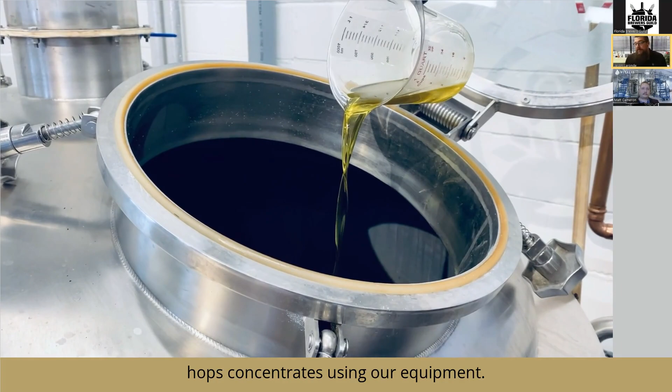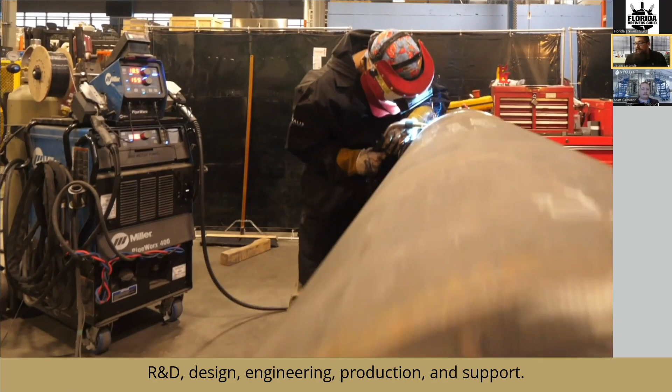So at Vitalis, we provide clean tech solutions for some really cool markets. Our experience with the beer industry actually goes back several years. It started with helping one of the world's largest hops extractors create specialty CO2 hops concentrates using our equipment. We are a vertically integrated original equipment manufacturer of CO2-based technologies with in-house R&D, design, engineering, production, and support. Our mission is to help producers thrive while becoming more resilient and future-proof.

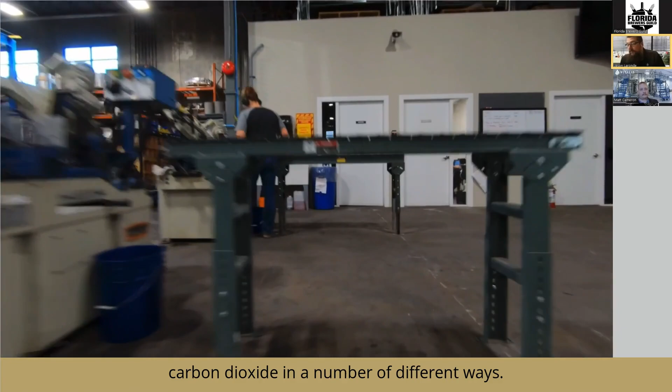We do that by utilizing the unique properties of carbon dioxide in a number of different ways, like extracting or refining natural ingredients from biomass, or employing CO2 as a heat transfer fluid and a natural refrigerant, or recovering and distilling CO2 for repeated use, which is what we're going to talk to you all about today. We have over 150 installations on 5 continents, and our CO2 expertise is recognized worldwide.

As Sean mentioned, CO2 is a big part of our day-to-day in the brewery, and it's a key part of the operation, probably something we all just couldn't live without. So when we're looking at usage in craft breweries, whether you're packaging, blanketing, or purging, we all need CO2 in some shape or form. But we also know that unfortunately CO2 is not free these days.

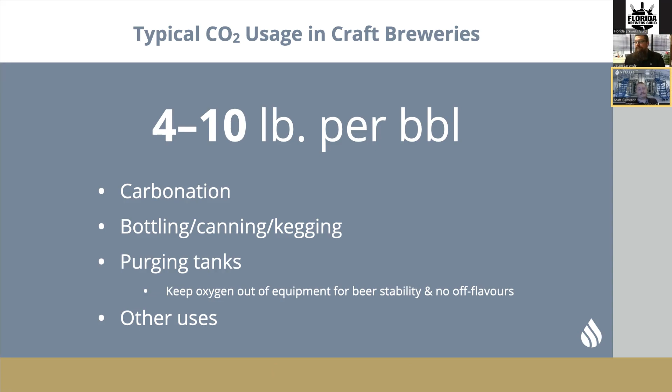CO2 prices can vary dramatically from region to region, fluctuating with factors such as shipping distances, fuel prices, transportation shortages, and supply disruptions. And sometimes CO2 just isn't available at any price. CO2 prices have actually increased by 58.2% over the last 10 years, outstripping inflation by more than 2.5 times. So these are costs that you can't entirely pass on to your customer, and you need to absorb them as an increasing cost of doing business.

We're curious if you want to drop into the chat and tell us what your current rate is for buying CO2 by the pound.

On top of the cost of CO2, supply origin is something that's nice to know in any food and beverage application where the product you're making is ultimately being ingested by your customer. It's always nice to know where that's coming from and how it's being produced, so your customers can have peace of mind as to what they're putting in their bodies.

Typically, the CO2 you purchase in bulk from your supplier will be derived from things like oil and gas wells, possibly ammonia production for fertilizer, or ethanol production. So ethanol production, okay. Oil and gas wells, maybe not so much.

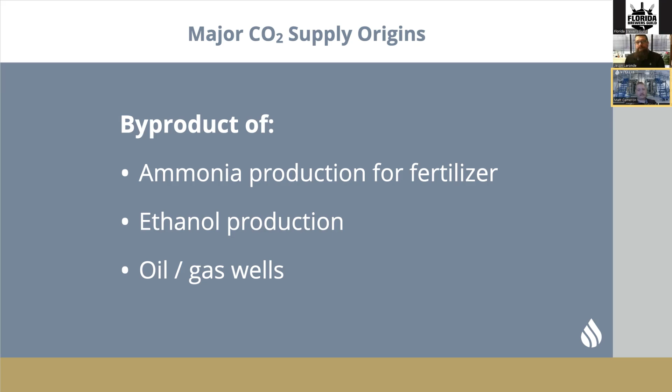As we've all seen, and we're probably all very familiar with, the production of CO2 from the various sources we just discussed can have some real world negative impacts. Whether it's plant maintenance or plants shutting down entirely, as we've seen in New Zealand, these can all result in supply chain disruptions, higher prices, or possibly even a nice little force majeure letter from your supplier, which is not what we really like to see.

One other interesting looming implication is this 45Q tax credit. I'm curious how many of you are familiar with this, but it has the potential to possibly change the landscape quite significantly, with CO2 suppliers basically being incentivized to sequester their carbon as opposed to their normal channels of selling it to their customers.

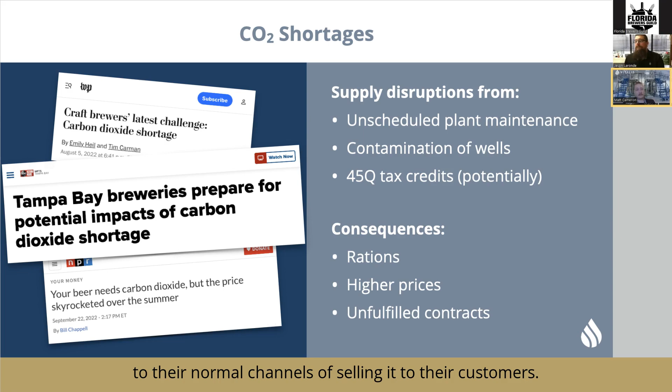So for all these reasons, we've all been frantically looking at ways we can reduce or optimize our consumption in the brewery day to day, right? Spunding, maybe chaining your tank blowdowns together, scouring the brewery for potential leaks, just to make sure you're capitalizing on every kilo or pound of CO2 you're using.

Then there's also nitrogen for purging. I know this is a pretty familiar process for a lot of breweries that are looking to knock down their CO2 usage.

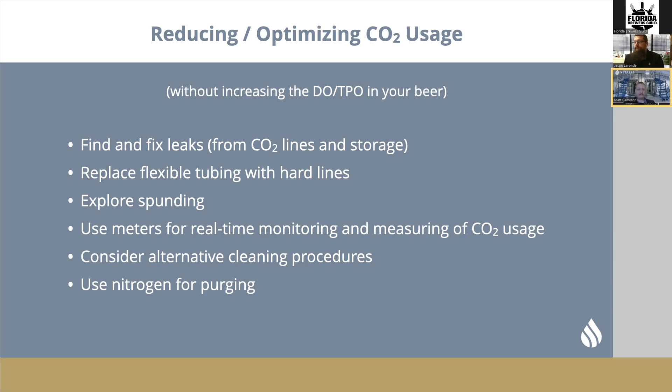So regarding nitrogen, why don't we capture CO2 from the air like we do with nitrogen? Well, this is the makeup of the atmosphere, and the majority of this air is nitrogen, which makes it much easier and more economical to capture, clean, condense, and store for use in your facility. Nitrogen generators aren't new - it's what we use in nitro brews. It is a piece of equipment you can buy. But because the vast majority of the atmosphere is nitrogen, there's a lot to get.

There's, of course, the oxygen component of the atmosphere, which is what we need to live. Then there's argon, and then there's CO2. And CO2 makes up just 0.04% of the atmosphere, so it just makes economical capture impractical.

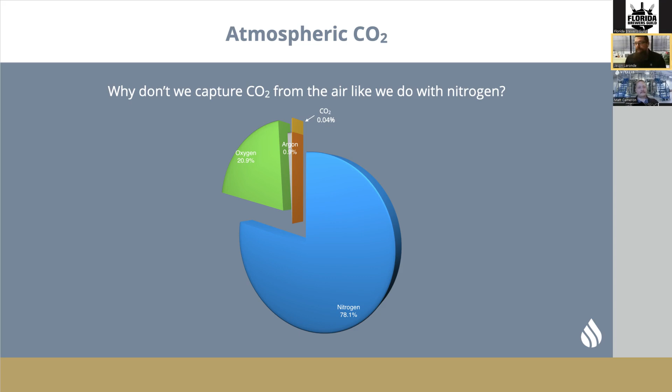Yeah, as Jason mentioned, there's not a lot to go around in the air. So when we look at CO2 produced from fermentation, the numbers are much more favorable. As we all know, there's variables that affect overall production - higher alcohol content, how much you can capture on the front and back end, depending on what system you might be looking at. But either way, it has the potential to really be the great equalizer. The ratio of produced CO2 to consumed CO2 can be as high as 3-to-1 in any given brewery.

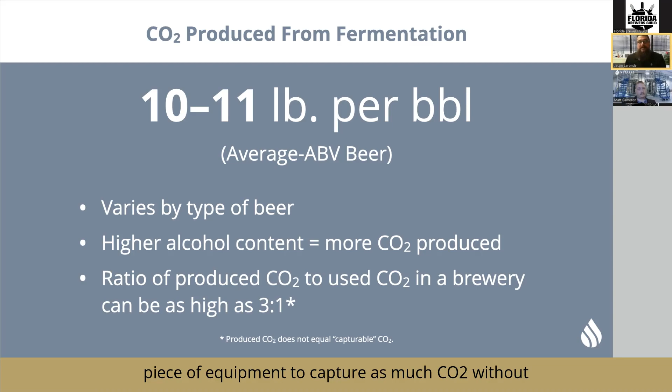So I'll let Jason maybe dive into some of the math on this. Yeah, so CO2 capture is not a new technology, but often equipment is marketed as to how many barrels a piece of equipment might be appropriate for - that's how you size equipment. But in actuality, it's more important for you to understand how much CO2 your brewery is actually producing, so that you can select the most appropriate piece of equipment to capture as much CO2 without overbuying or underbuying the capture equipment.

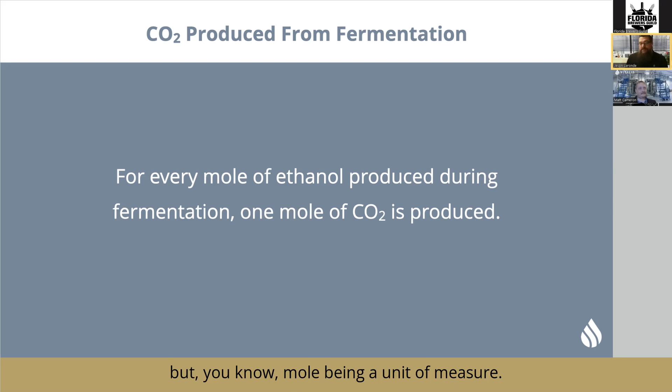For every mole of ethanol - and this is going to get really nerdy into the science, but mole being a unit of measure - for every mole of ethanol produced during fermentation, 1 mole of CO2 is produced. So we can use this formula, which allows us to calculate how much CO2 is actually being produced by each individual brewery. We look at the volume of beer that a brewery is producing per year, we look at an overall ABV of the beer or beers that brewery is producing, multiply that by the density of ethanol, then multiply that by the molar mass of CO2, and divide all of that by the molar mass of ethanol.

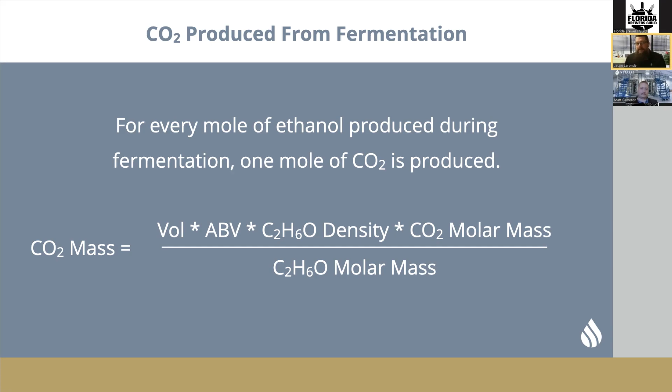We can actually figure out how many pounds of CO2 a brewery will produce every single year. And if we plug that into a couple of case study models, we're able to show very definitively on or about how much CO2 you realistically could generate. Then when we compare that against what you pay for CO2, and how much CO2 your brewery uses every year, we're able to figure out what an ROI model might look like when deploying CO2 capture equipment into your particular brewery.

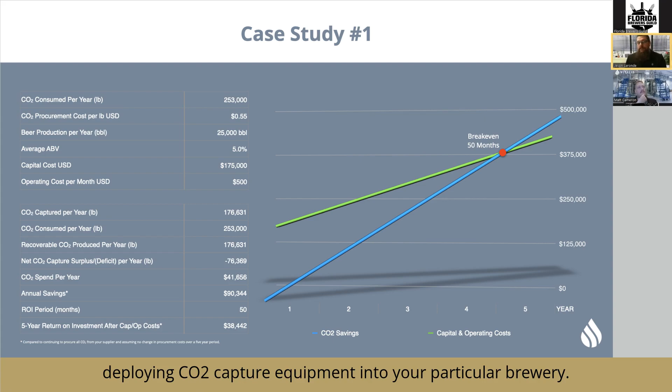In this particular case study, we have a brewery that does 25,000 barrels a year. Their current consumption is about 253,000 pounds. The current rate they pay now with their suppliers is 55 cents a pound, and their ABV is around 5% when averaged across all of the brews that they make. They're looking at a capital cost of equipment of around $175,000 and an operating cost of around $500 for utilities and maintenance for that particular piece of equipment.

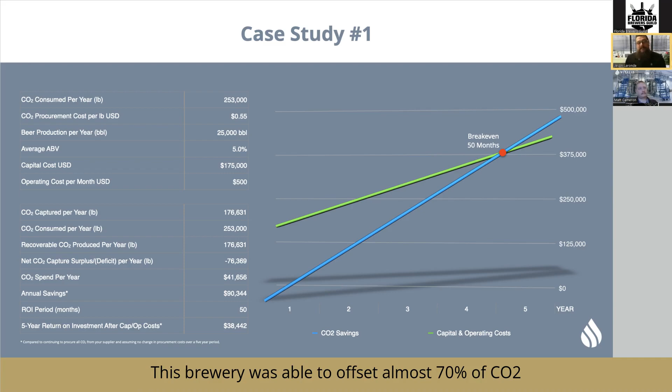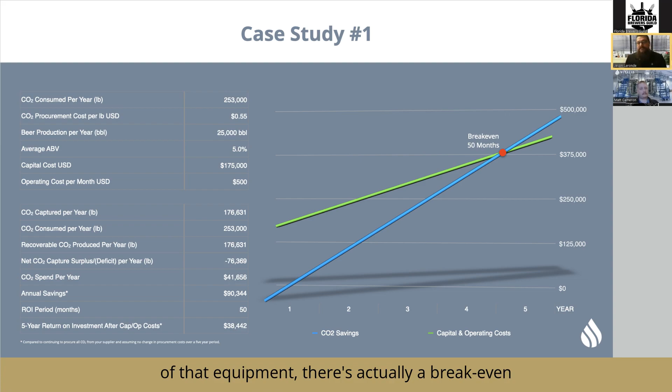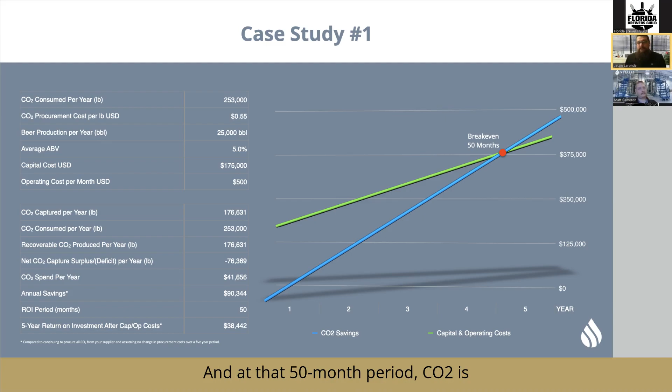This brewery was able to offset almost 70% of the CO2 that they otherwise would have had to procure, turning out to be an annual savings of around $90,000 of CO2 they didn't need to buy every single year. After including procurement of the equipment and the commissioning, installation, and operation of that equipment, there's actually a break-even period of around 50 months for this brewery. Over the course of 5 years, this brewery would actually be up around $38,000. And at that 50-month period, CO2 is effectively free forever for this brewery.

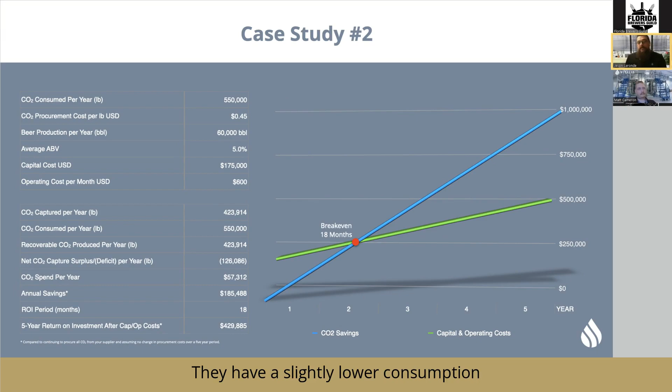Here's another brewery. This is a 60,000 barrel a year brewery. They have a slightly lower consumption per barrel at 550,000 pounds, and a slightly lower rate because they're buying more per year from their supplier at 45 cents. ABV is the same at around 5%. The break-even for this particular brewery is around 18 months, offsetting nearly all of their CO2 procurement, producing nearly all of their CO2 themselves.

Then here is a slightly larger brewery at 100,000 barrels with a consumption of 605,000 pounds, and a very good rate at 32 cents. This actually stretches out the ROI to a longer period of time because the rate is so good. But this particular brewery is able to offset 100% of their total CO2 consumption with capture alone, net zeroing their CO2 bill on day one, and able to break even all of the capital costs to implement the equipment and start capturing their CO2 in just 13 months, with free CO2 and zero CO2 bill for the entire operation of the brewery ongoing forever.

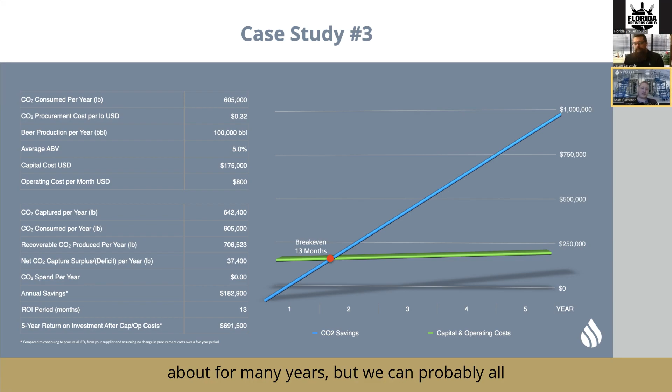That's really neat to look at these real world case studies and show you that the numbers really do make sense. This is something we've all known about for many years, but we can probably all agree that over the last year, maybe 2 years, it's a conversation that's really become quite popular. We're always hearing more when we go to shows or speak with different breweries in the area that CO2 prices are rising, and supply chain issues have been coming up more and more. So the conversation of CO2 recovery systems has become quite popular, but it's not new technology.

So what's the reason this is starting to become feasible for breweries nowadays? Well, until recent years, there were those typical barriers to entry. The annual production had to be 100,000 or 200,000 barrels. You had to be able to outlay 7-figure capital investments and be able to allocate space in your brewery that a lot of mid-size, smaller craft breweries just don't have the floor space for. Let's face it, we cram as many tanks in and just do what we need to do.

There might be dedicated employees you would have to hire to run this very complex equipment. So there are all these barriers that basically led to this technology not really being readily available to anyone unless your name was Molson Coors or Anheuser-Busch. Things have changed a little bit with advancements in technology these days.

Manufacturers have been able to overcome a lot of those barriers. We're able to develop a system with a more compact footprint, and leverage our supply chain to procure these components that are now being developed at a smaller scale, so that we can build systems that aren't these behemoth $2 million systems. All these things have allowed us to develop this technology so that you can bring it into your brewery and have your cellarmen run it. You're not required to put a new addition on the building to put this equipment in.

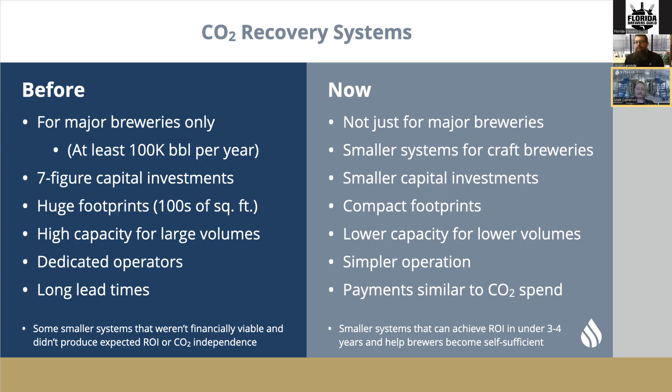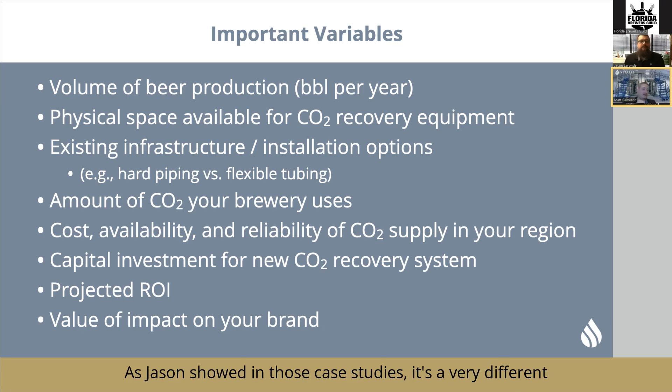As with anything, when you're looking to purchase equipment or researching new technology, there's always variables to consider, because it's certainly not a one-size-fits-all solution. One thing you've got to consider is the volume of beer you're producing and the amount of CO2 you're using. As Jason showed in those case studies, it's a very different scenario based on whether you make RTDs—is my CO2 consumption a lot higher than your average brewery? So it's important to look at the numbers.

How much beer am I making? How much CO2 am I using? And how much CO2 will I produce from fermentation? All those things go into the equation to work towards: does this make sense for me to implement?

Sometimes certain breweries will have really great rates with their suppliers for CO2. So if you're paying 10 cents a pound for whatever reason, let me know, because I'd like to talk to your sales guy. It might not have that same ROI calculation that Jason was showing, so all those variables are really important to look at.

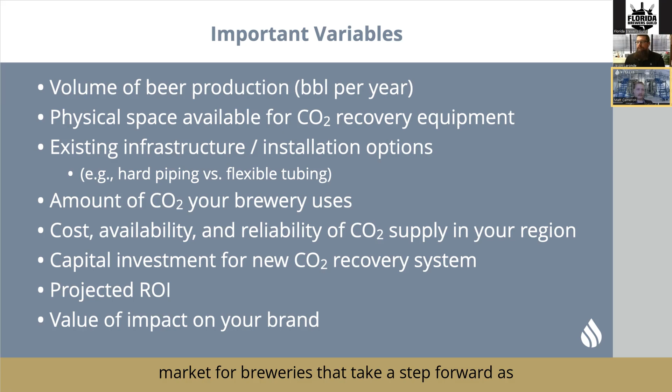At the end of the day, that all equates to what ROI might be. But outside of the financial thing, it's also important to consider the optics of that on your brand—what the value of the impact is on your brand. It's something everyone's talking more and more about: sustainability, clean technology. There seems to be a lot of respect in the market for breweries that take a step forward as innovators and look at new technology, and that pays dividends, because your loyal followers and customers will respect you for that, and as a result they'll probably come into your tap rooms more or buy more of your beer. So there's a lot to consider when looking at these systems.

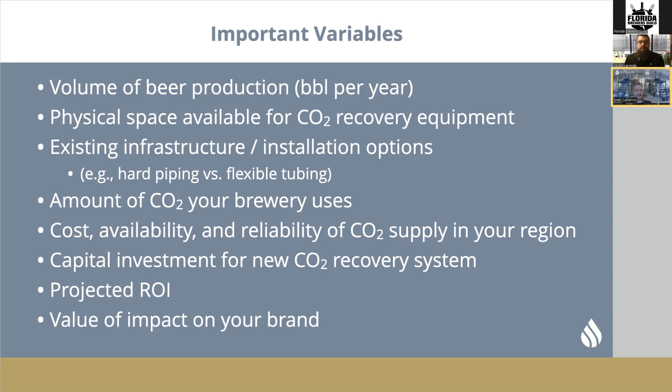There are also factors to consider when you actually begin shopping. If you've decided this technology is the right move for your brewery, there are some more intimate key points to keep in mind while doing your research. What is the capacity of the system? This is a really important one we always look at: if you're brewing 10,000 barrels a year and you've found the system that fits you just right, is that going to be obsolete in 2 years because you've maybe moved up to 15,000 or 20,000 barrels?

Maybe you had a really great couple of years, you put in a new row of fermenters or two, and all of a sudden your annual volume has maybe doubled. Is that system going to be able to keep up with that capacity of beer? Because it's not great to spend 100,000 or 200,000 on a system and then 2 years go by and suddenly it's not really pulling its weight anymore. So the throughput of the system compared to your current volume, but also your projected volume, is something very important to consider.

Maintenance and consumables, something very easy to overlook. I've got the system, it's operating, I love it, but what filters do I need to replace? Are those filters maybe a proprietary product from the manufacturer? That might equate to not being able to get them when you need them, right? And so now we go back to being limited by supply chain. So I would say keep a close eye on what those consumables look like and what preventative maintenance looks like so that you can actually keep the system on and running all the time so it can continue to do what it's designed to do.

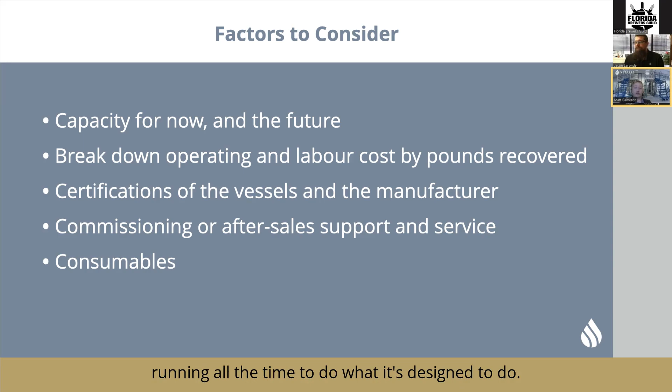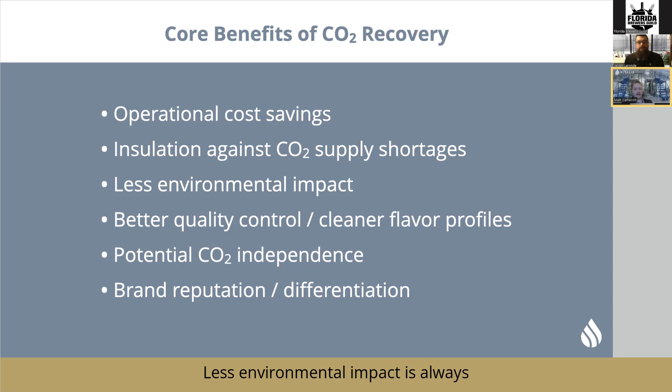We can probably all agree that operational cost savings are probably one of the key drivers here. Some of those numbers that Jason flashed up on the case studies are pretty appetizing. So money does make the world go round, but there are other things to consider aside from the bottom line. Cleaner, higher quality CO2 resulting in a better quality end product for the customers, better lacing, better head retention are all things we've seen as a result of using recovered CO2. Supply chain autonomy, not being as dependent on your supplier, whether it's because of shortages or the price itself. Either way, it's kind of nice to get out from underneath that shadow. And at the end of the day, we go back to the impact on the brand, right? Less environmental impact is always a great feeling and a great look.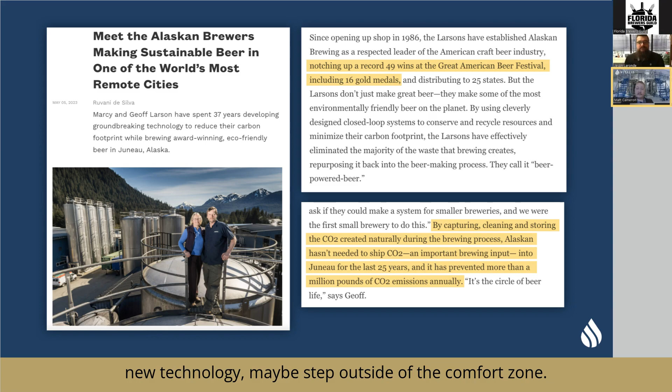There always needs to be social proof for people to adopt new technology, maybe step outside of the comfort zone. It's not easy being the pioneers of new things that not a lot of people are doing. So it has been going on for a long time, right? Big Beer's been doing it, but then craft brewers start to get into it. We've got Alaskan Brewing here that kind of did this more out of necessity due to their geographical location. When you're living in Alaska and trucking your CO2 all that way and trucking your beer around, it really starts to add up. So these guys are a little bit ahead of the curve. 25 years ago, they jumped down the rabbit hole. But thanks to pioneers like Alaskan, this technology is becoming more accessible, and it's also spreading awareness because people can see this. The proof is in the pudding, right? The breweries are doing it, they're seeing the impacts it has on their business model, and then people are following suit.

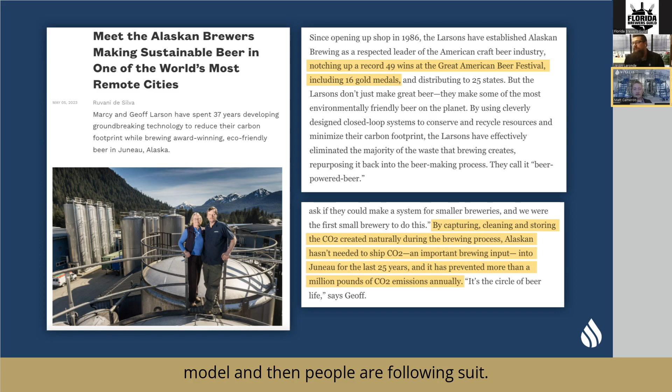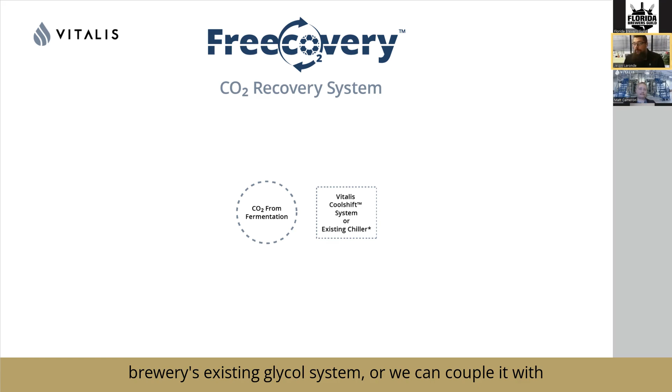So how does it work? First of all, what we start with is the CO2 from your fermentation process, and in many cases, also the CO2 recaptured from blanket gas and purging. We want to capture as much CO2 in your system and recycle it as we can. We then either use a small amount of capacity from the brewery's existing glycol system, or we can couple it with one of Vitalis's R744 CO2-based Coolshift heat pumps, if this is part of a new brewery or maybe a broader retrofit. The CO2 recovery system encompasses these processes here.

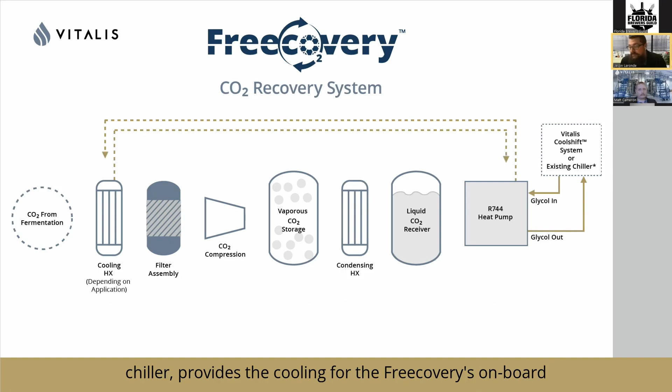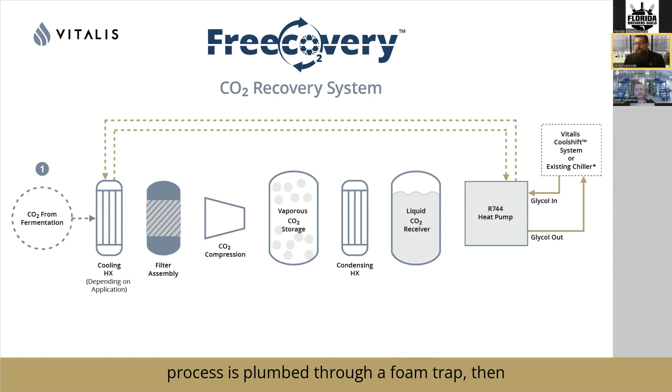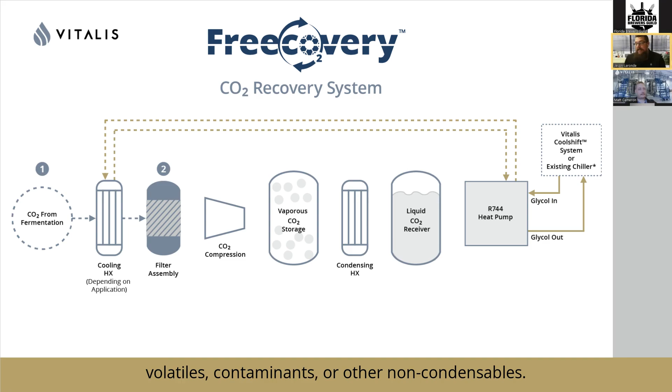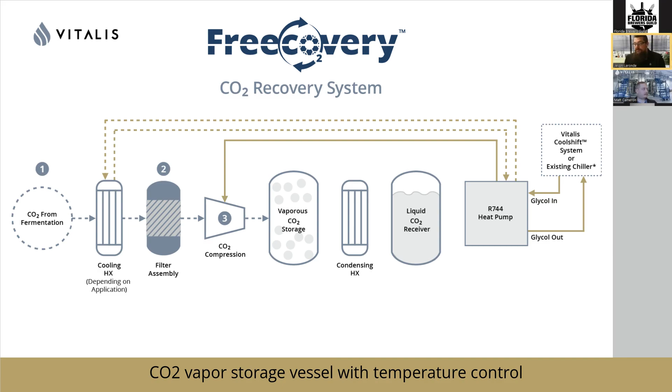So the brewery's glycol system, or an optional Vitalis Coolshift chiller, provides the cooling for the Freecovery's onboard heat pump, which cools the cooling heat exchanger. CO2 from your fermentation and other processes is plumbed through a foam trap, then passes through the cooling heat exchanger. This cooled CO2 gas is filtered through a series of readily available low-cost filter media and multiple stages of filtration to remove things like volatiles, contaminants, or other non-condensables. This cleaned CO2 gas is then compressed to a high-pressure CO2 vapor storage vessel with temperature control from heat transfer fluid from the heat pump. This CO2 vapor then passes through another condensing heat exchanger, which condenses that vapor to a high-pressure liquid, which can be pumped to either an existing bulk CO2 storage tank or a tank that Vitalis can provide.

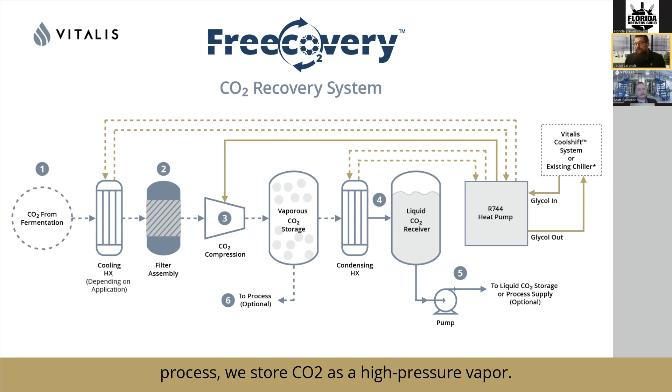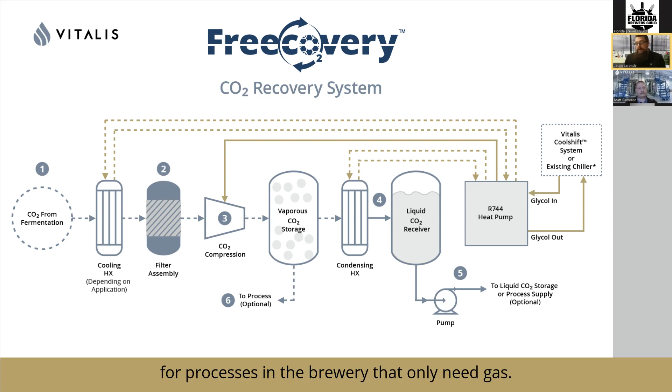And a really great feature of the recovery system is that, if you'll remember, in the middle of the process we store CO2 as a high pressure vapor. What we're doing is actually conserving a huge amount of operational energy to run equipment for processes in the brewery that only need gas. There's no sense using all the additional energy to condense the CO2 to a liquid, only to then have to boil it back to a gas for processes like purging and blanket gas. This way we can plumb gas processes with gas and liquid to liquid processes with no wasted energy to convert phases twice unnecessarily.

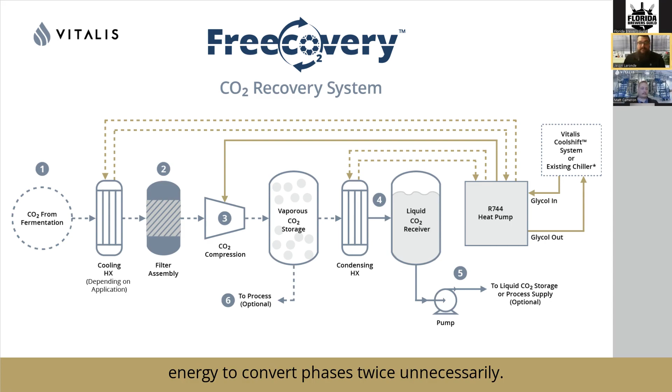In case you're wondering what this actually looks like, we've got the magic black box here pulled up on the screen now. We provided a little bit of dimensions just so you can help picture what this might look like in your own facility.

This is Freecovery 50. It does 50 kilograms per hour. So as you can see, you can distill close to 650,000 pounds of liquid CO2 per year.

This equipment can be installed directly in your cellar, possibly in a mechanical room nearby to the cellar, or even outdoors with an enclosure if the space just isn't there inside. If there's an adjacent wall close to the cellar, but it makes sense for this unit to be outside, that's also a possibility. There could even be a scenario where it goes up on a mezzanine in the cellar, depending on how your particular brewery is laid out.

Speaking to the purity, most of these systems will get purity of around 99.99 plus. One key thing is the performance on dissolved oxygen. Yes, it's pure CO2 analytically, but that can be broken down in a myriad of ways. One thing I've always heard in the brewing industry - I've probably installed and commissioned 500 brew houses over the last 20 years - DO is always kind of creeping around and being a problem. So one of the things we've focused on is a pure, clean CO2 with low dissolved oxygen.

The system should be able to integrate into your existing CO2 network. You shouldn't have to be running dedicated pipes here, there, and everywhere. As Jason mentioned, we'll tap into the existing glycol system to provide a little bit of cooling for some of the compression processes. So it should be relatively streamlined to put this into your brewery and utilize as much of your existing network as possible.

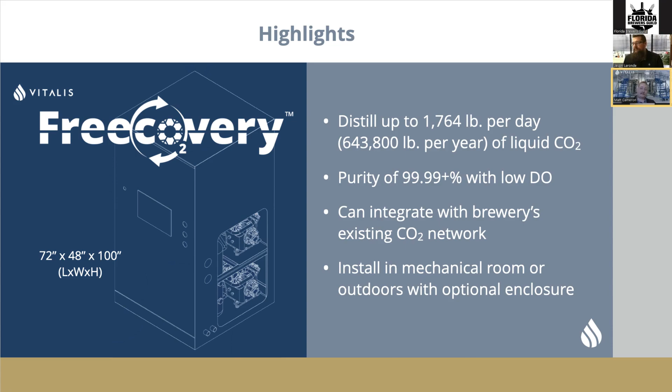In addition to CO2 recovery, Vitalis, as we mentioned, we're CO2 handling experts. So we manufacture complete solutions for elsewhere in your brewery. We manufacture R744, which is the refrigeration term for CO2, chiller packages, and custom heat pump racks for large-scale production environments, CO2 and multi-solvent extraction systems for hops extracts and other botanicals, and downstream refinement systems for the post-processing of extracted products.

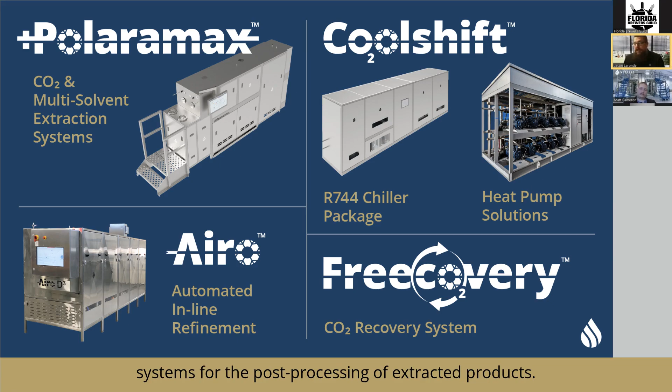So with that, I'll close with: Vitalis Freecovery CO2 capture system is the first commercially available CO2 recovery system designed specifically for mid-sized commercial craft breweries that can provide economically viable capture of CO2 to match your rate of production and allow you to approach or achieve CO2 independence.